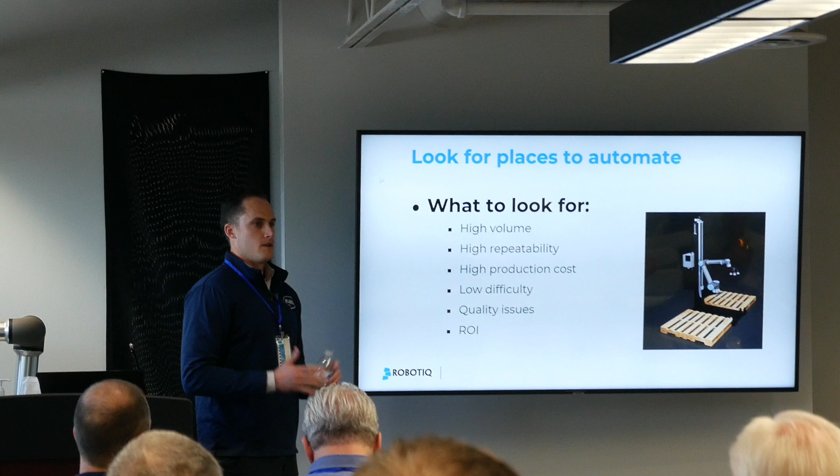What we find, because we do custom applications all across the board - some are a lot more difficult than others, and some land, some don't - is that palletizing is a really, really great place to start. It's a process that 90% of our customers have. You guys are all making something, and it's got to go out the door, so 90% of the time that's on a pallet, and someone is currently doing that, or there's some process currently doing that. And normally it hits on all of these factors.

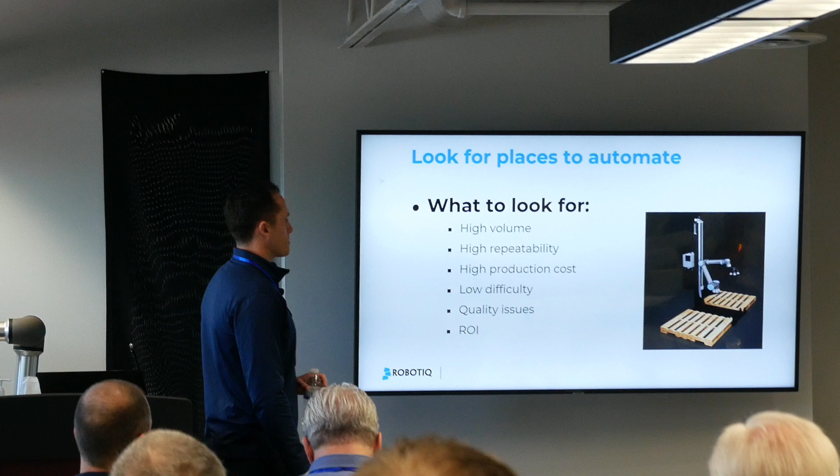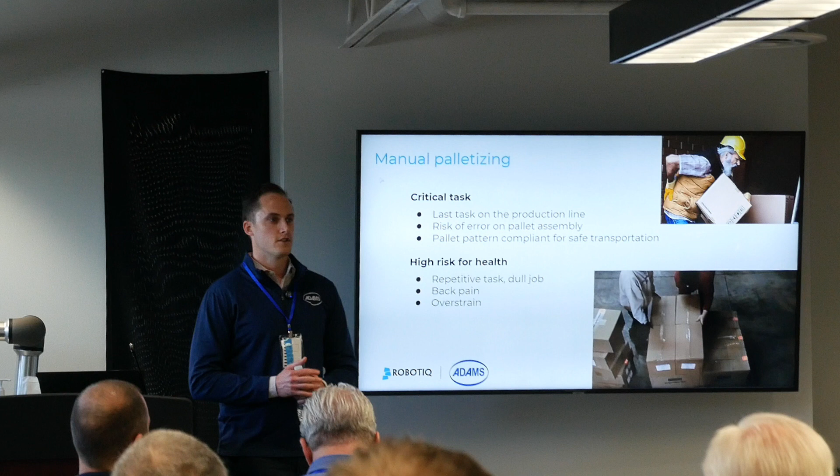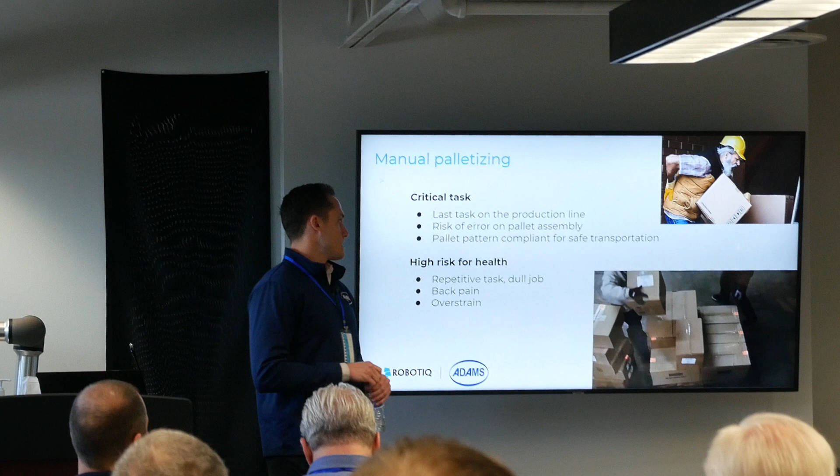Manual palletizing is a critical task. It doesn't seem like that because you're just stacking boxes, but it's the last thing that hands touch before it goes out the door. So there's issues around: did the wrong product go on the wrong pallet? Now you're dealing with customer complaints, returns, whatever, all of that stuff. And then there's a lot of ergonomic issues with it as well, depending on what you do - some of that stuff's pretty heavy.

It's hard to say how long people are willing to stack boxes all day. It's hard to keep people doing those jobs. And it's not a task that you probably love paying for, because you'd probably rather have those hands doing something else that has more value to your process, and not just wasting time stacking boxes all day long.

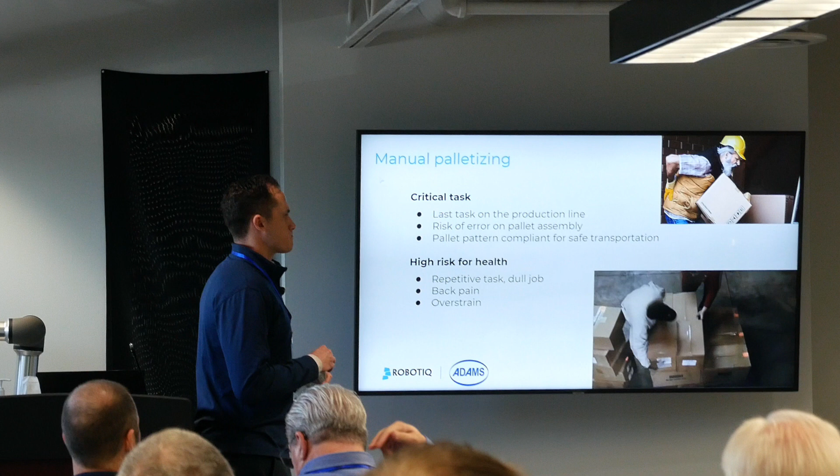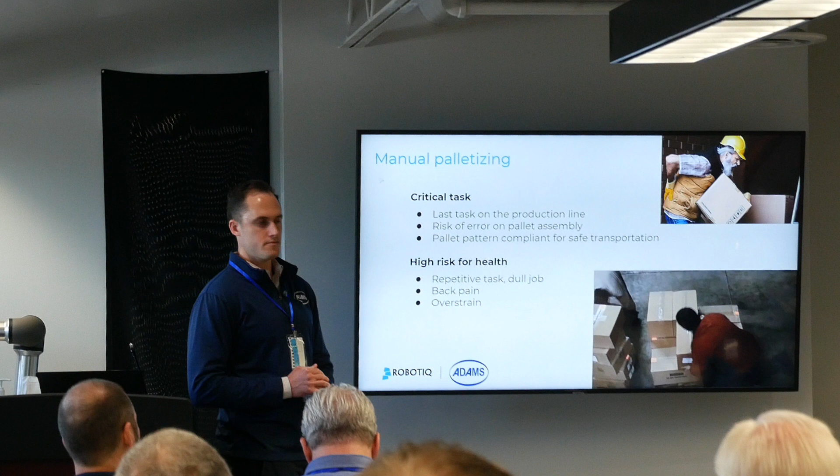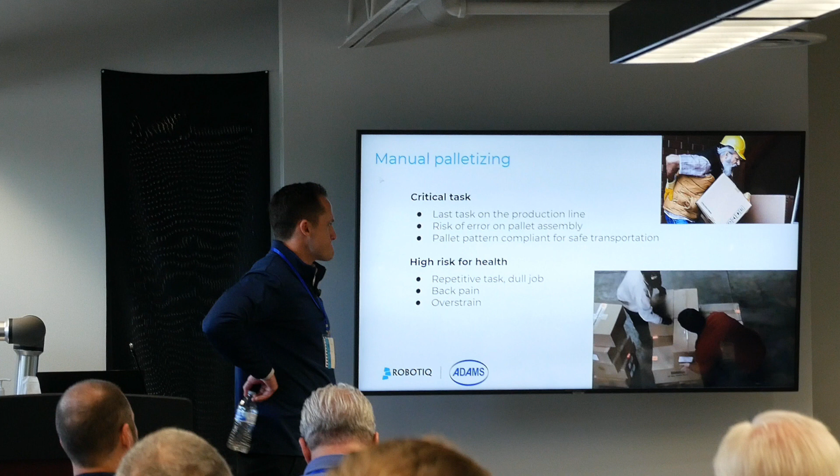We have a customer, Cascade Coffee up in Seattle, and the upper management was being pulled into these tasks because the temporary workers that they had hired didn't know how to build the stacks properly. So it was a constant repalletizing that was occurring, and upper management was being pulled into a task he should not be focusing on. But yet the product had to get out the door - he had to satisfy his customers' needs. So he was being pulled into something he shouldn't be; he's supposed to be focusing on all these other deadlines and things he needs to meet.

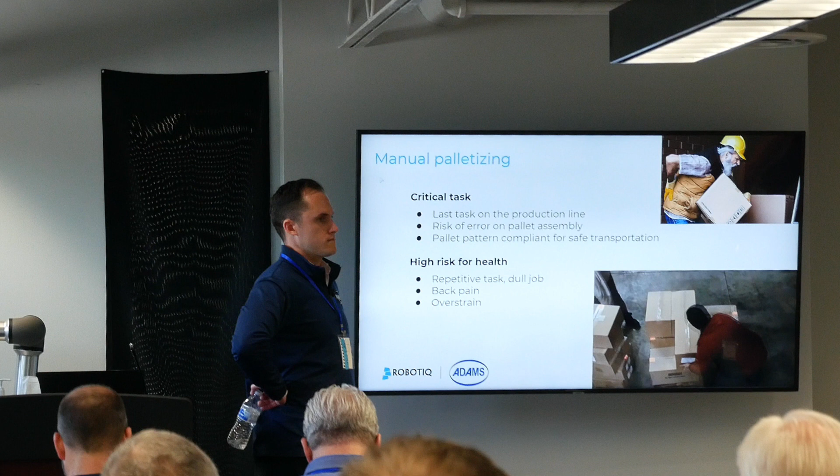But the lack of knowledge of how to palletize properly, and that temp worker revolving door of people maybe not showing up when they don't feel like it. There's not a lot of accountability there. And when they show up and have to do a dull, boring task, it's something they might not show up for again the next day. And it's something that's out of your control. If you can, consider automating these sorts of processes, you're really de-risking that happening.

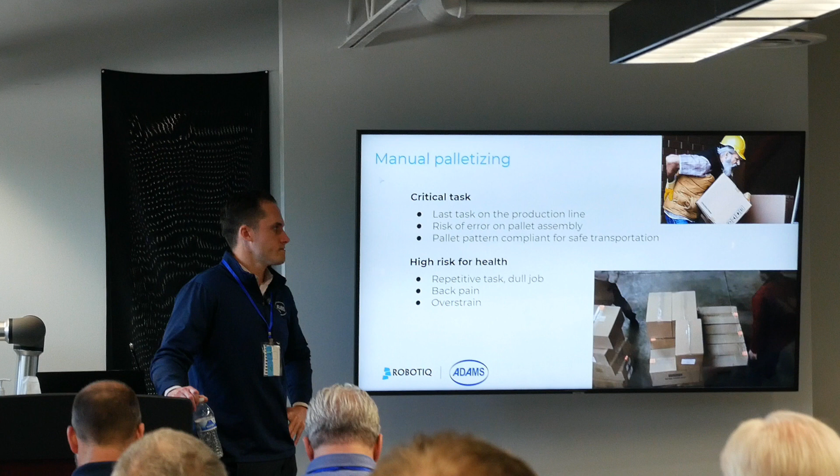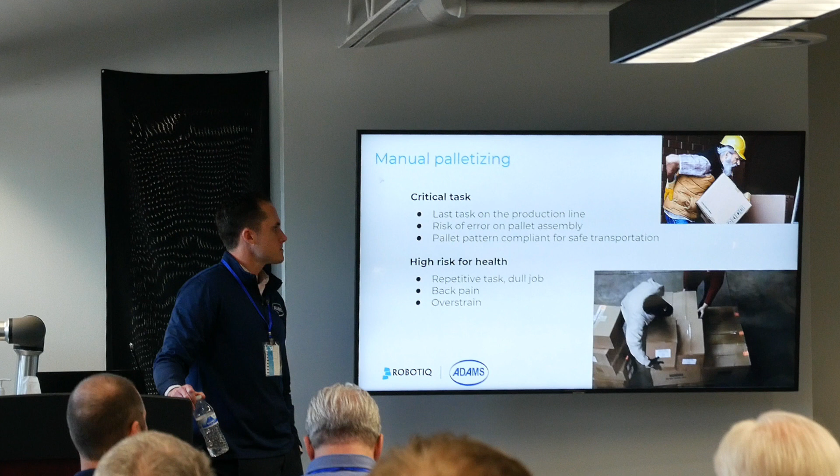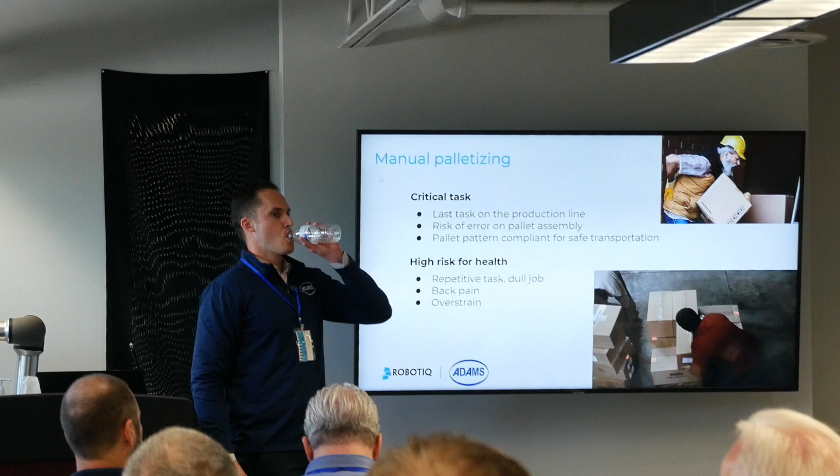In this facility, particularly where they went ahead and automated with our palletizing solutions, now if there's a troubleshoot and the line is down and they have to go back to manually palletizing, they don't like it. So if you're fearful that the shift away from this sort of task is going to be harmful for employee retention, we have not seen that. We've seen the fact that they can go into a better value-add task in the line. They're helping production increase, and they're probably getting into a job that has higher wages and is making them more happy and satisfied in their day-to-day.

That is a snowball effect, and that's something that maybe people don't track in statistics. Satisfaction of that employee matters a lot to how good the production is going to be, how happy they are to show up, they're showing up on time, and then things are being produced at a fast rate and you're meeting your customers' demands as well.

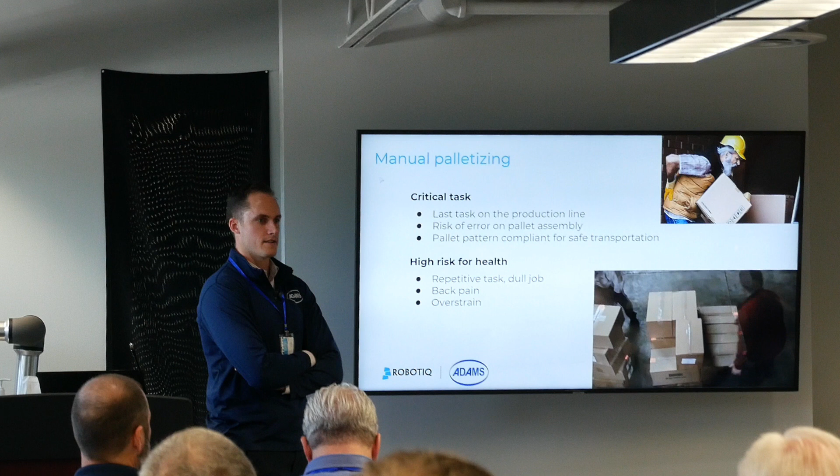Yeah, one thing we'll talk about is, from an operational standpoint, it adds predictability to what you're doing, right? Knowing, not having to say we're going to be way behind today because 3 people didn't show up. You know what I mean?

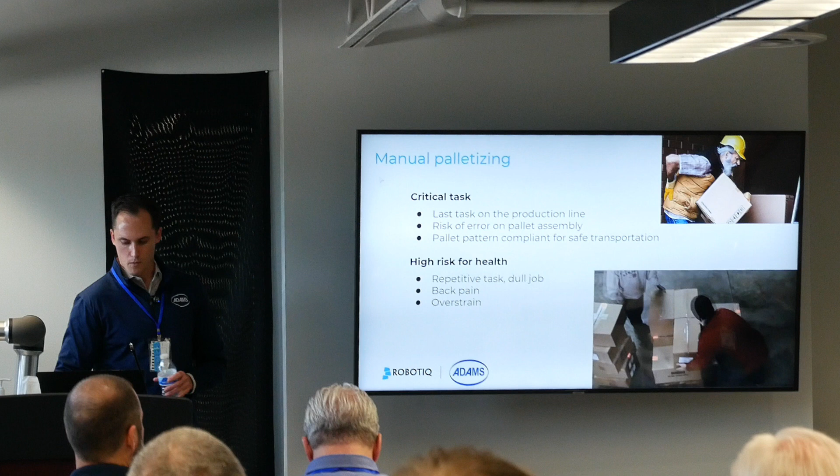So let's say you decide, okay, we're gonna palletize, right? You can obviously continue manual palletizing, and these are the issues we see associated with that. Those are pretty cut and dry there. But you can also do industrial palletizing. What we're going to touch on here is the value of doing a collaborative palletizer, like the one you guys will see down in the shop after this.

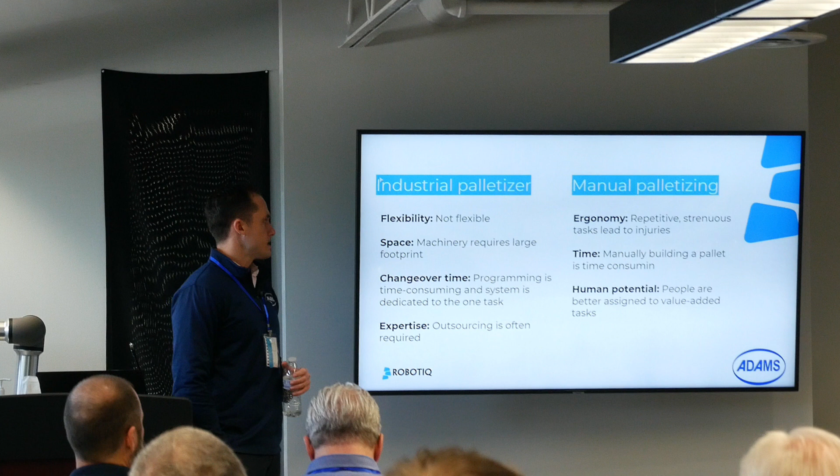Industrial palletizing definitely has its place, right? I mean, we've done them. If the application calls for it, it is what it is. If it's really heavy or really, really fast or anything like that, you just have to go that route.

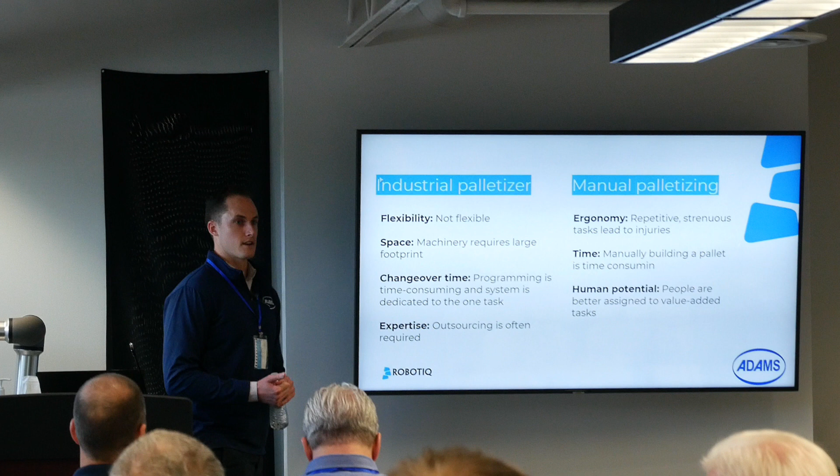But one thing, they're not flexible. So it better be something that you have a contract for X amount of years, not something you can be fluid at all. You can't decide, okay, for 6 months we're going to do this, and 6 months we're going to do that. Takes up a lot of space because they're industrial robots, so they have to be hard guarded. So now you're talking a big cage, a lot of safety. It's not as flexible to get pallets in and out. There's just a lot more that goes into it.

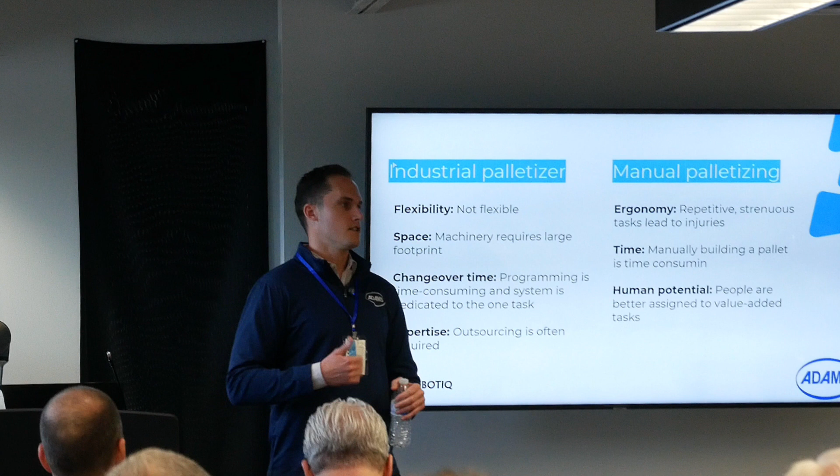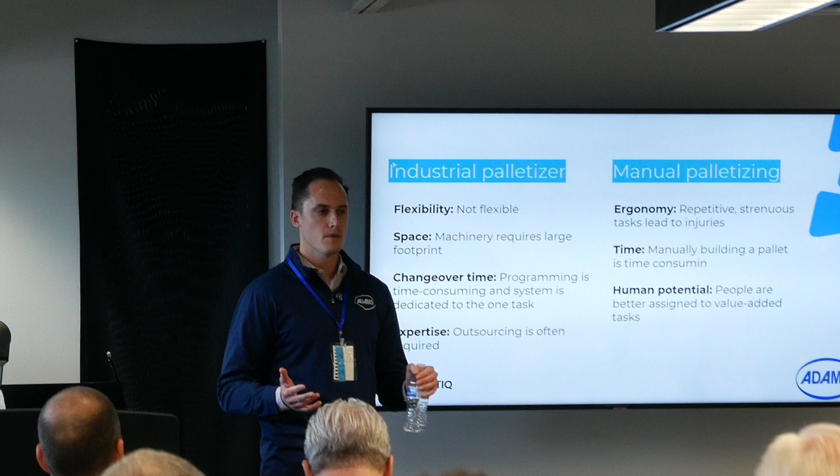The time, right? Most of the time on anything industrial related, unless you have a group internally that does robot programming, you're going to be relying on a third party like an integrator to do it. And then any sort of changes or tweaks to a program, you're either going to be at their mercy for when they can get that done, or you're going to be doing it yourself, and that takes a lot more time.

Yeah, I went into a facility and they had a big room dedicated to palletizing. It's a well-known brand, they produce some nice candy. I love their candy, it smelled good in there, all good things. But what they noticed is that they had these giant palletizers, there were 2 of them in this room. And when those went down, it didn't just affect one line, it affected all 15 lines feeding into that giant palletizer. So now all of a sudden this lack of flexibility and ability to get anything out the door was a mad panic. And then again, they relied on that outsourcing of knowledge coming in to fix that issue. It was just a snowball effect.

So the idea for them was to take a cobot palletizer, drop it in on a few of the lines, be able to maybe move that when needed in certain production instances. But if something were to go down, it would affect 1 or 2 lines, not 15 lines in that instance. Also, all this crazy conveyance that is overhead and all of this, it looks really impressive, but the amount of money for installation of something like that and the cost, and then actually knowing that you're going to even get that material.

So pretty soon your project that was, we want to do this year, it gets pushed down the line, and the time that you don't automate is all time that we're wasting. And we all know that, right? Time is money. We all hear this.

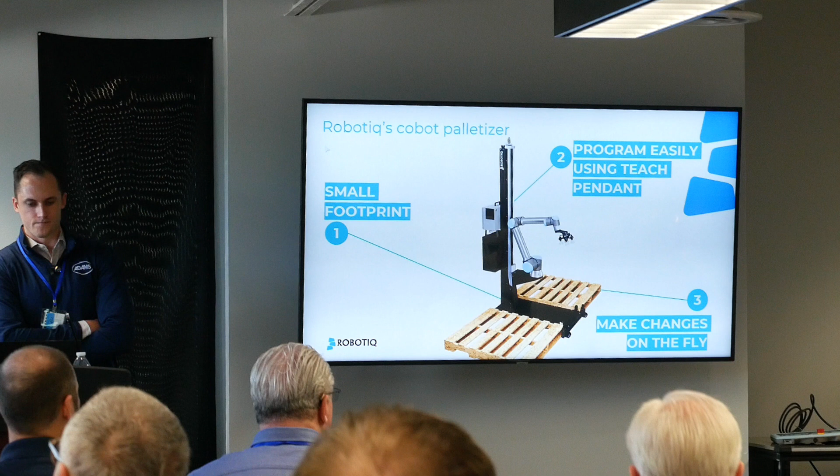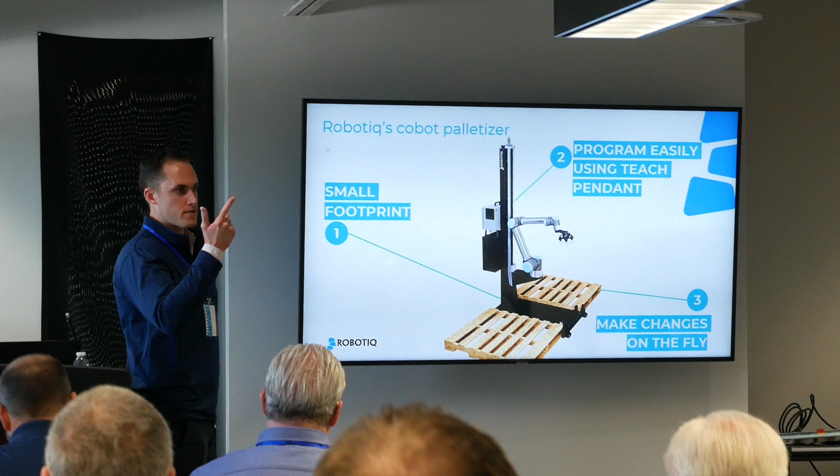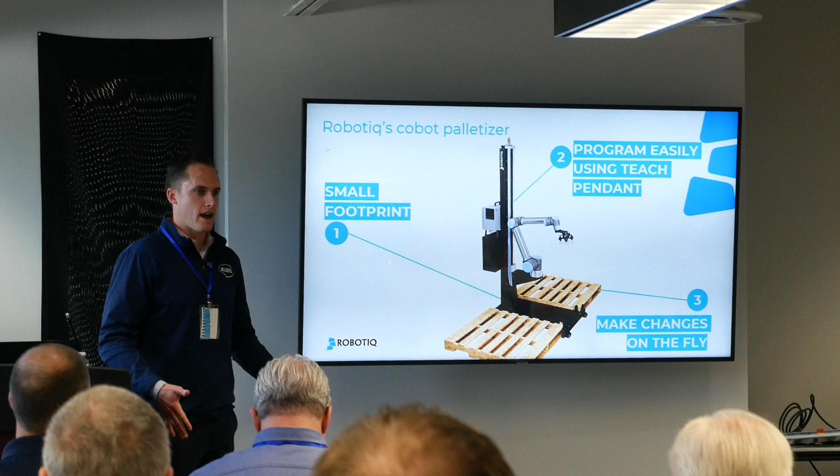So we'll jump into some of the different models. We have the brand new UR20, the PE20, out on the floor, so I'd encourage everyone to go take a look at that. We've got a few different models, but we'll jump into that here in a sec. When we talk about a cobot palletizer, this is basically what you're looking at. Another thing we touched on was the footprint - when you go out there, you'll see that's the biggest one. You're really not taking up any more footprint than you would to have two pallets next to each other anyway. Our base is 2.5 feet wide, so that's a real big advantage.

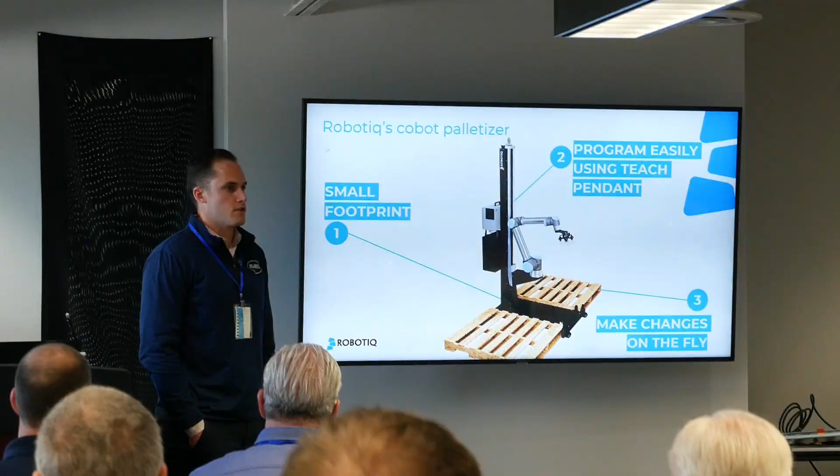Like Kendra was talking about, programming using the teach pendant - that knowledge transfers so much easier now. You don't need to know Python or C# or anything to program a robot anymore.

So to jump into the teach pendant, if Kendra wants to walk through this. Yeah, I'd be happy to.

Universal Robots created a cobot, and a lot of other companies are creating cobots now, but what makes them a bit unique is the ability to integrate with third parties such as Robotiq. So if you think of your smartphone, you have all these apps you're using constantly, and you don't really think twice. You know the brand the app sits under, but you don't really think about how easily that integrates on your phone. You just use the app when you need to get maps or do something like this.

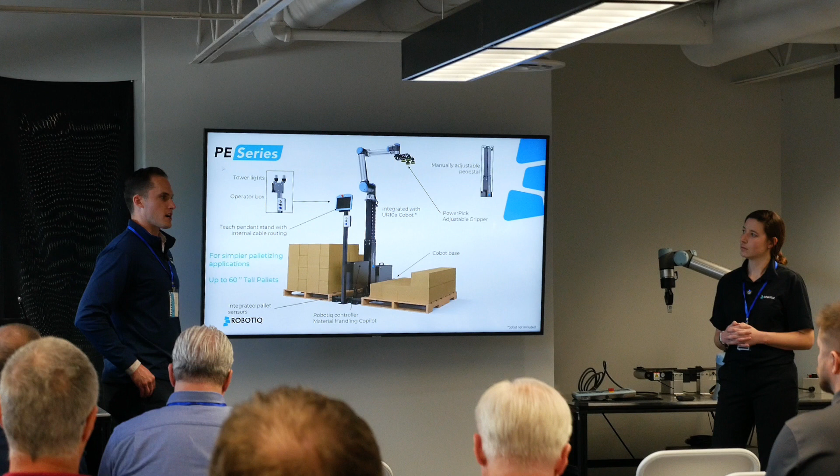Obviously, this is the most inexpensive or least costly option. But as long as your pallets aren't really taller than 60 inches, and we will double check on a simulation based on pattern and stuff like that, but you're typically pretty much good there.

Yeah, this model was actually created for the European market. So you saw how we showed you the AX version with the 7th axis, that has been the more popular unit stateside, because we stack pallets typically higher. We have a lot of changeover and flexibility. The PE10 was really made for when you're running 1 or 2 box types and you know it, and it's very repeatable, and your pallets are typically shorter.

And in the European market, it's not your typical 40 by 48 pallet, it's even smaller than that. So it's really important to consider what its use is, and then maybe what its use is going to be in the next 1 to 2 years. I think it's important to future-proof that as well. Good point, because you never want that to be a limitation, right? Our limitation in the past was the robot model, and now they have the 20. So for me, it's a no-brainer to future-proof yourself with the larger model.

And we have the 30 now too, as well, and then the UR30. So the next one, this is exactly what you guys will see down on the floor. This is the new PE20 with the UR20 robot.

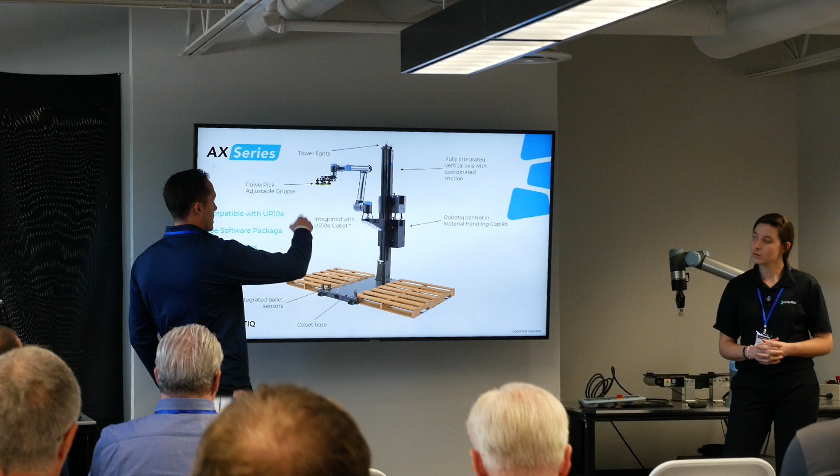And then the last one is going to be the AX series. So the biggest thing here is the Cobot's actually on a 7th axis. Now, one thing with our system that's a big advantage is this 7th axis in the robot is synchronized motion. The reason it's on a 7th axis is to handle much taller pallets.

But what's really unique about it is, for example, you'll see a lot of systems out there that are on almost like a telescoping pedestal. But what has to happen is that has to move and then stop, and then the robot's able to go and pick. What's happening in our system here is that motion is coordinated with the robot - the robot's moving into its pick position while it's moving up or down. So you don't lose any cycle time there.

So again, it all just depends on the pallet heights. There will be, I guess I don't know when, but there'll be larger models coming out with the 20 and everything like that to handle even taller pallets. I rarely see pallets that tall, but it is possible.

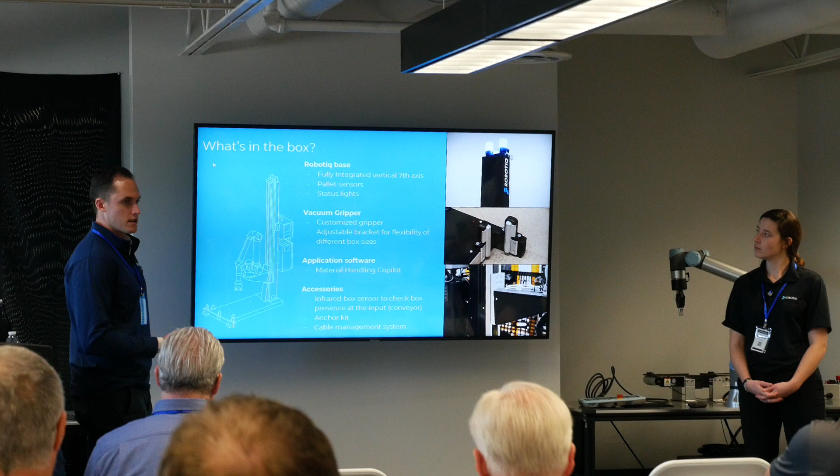Kendra and I took this out of the crate on Wednesday. This is what comes with it, right? Obviously, plus the robot. You get the base, depending on whatever model, with the 7th axis or without. Your pallet sensors, which are built in, will tell the system if the pallet's present or not, so you got to have it squared up to the base.

Yeah, that's that image here. So that's tied right to the stack light. Every time I have a pallet in place, and then I'm done, and I remove it and put a new one in, the system's automatically shifting from a blue light to a green light to say I'm in run mode. And then, of course, we offer it with the gripper or without the gripper.

I would recommend it with the gripper because that way you're not having to reinvent the wheel. The software, of course, and then you've got the box sensor, which will just mount right to your conveyor. It's just a presence-absence sensor to tell it when a box is there. A floor anchor kit if you wanted to do that, and obviously all the cable management as well.

Another thing to note with the software, we do free software along with the kit, and upgrades as well are free. I'm sure a lot of you play in this space, and it's always subscription based with all these upgrades, and if you want any help, there's a fee attached. We're not set up that way, and neither are you. The mentality is that it's open-ended.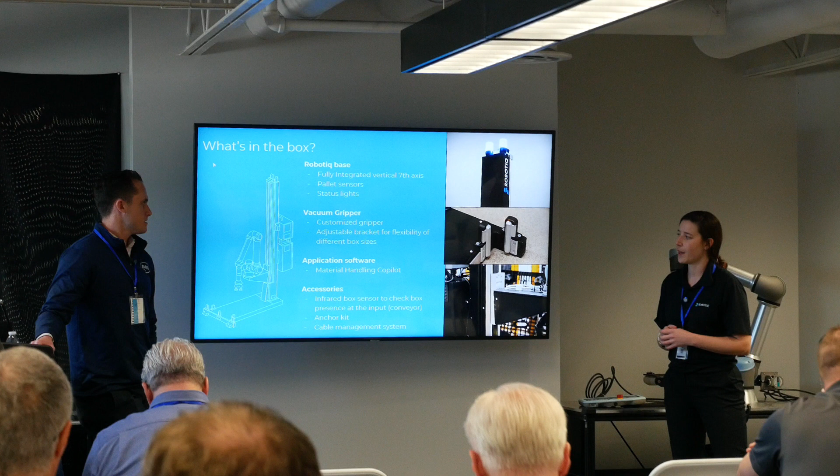Maybe that costs more on the front end, but you do not have that repeat cost over time, and you're going to have the support. We're a phone call away if you need support. So that is really the idea of our software. An example of that: 2 years ago, we didn't have the label orientation feature, and now we have that feature, and it's accessible to anyone who has our solution. Before, that wasn't a feature, but as we upgrade and innovate and create new features and better our system, you're getting those benefits as well.

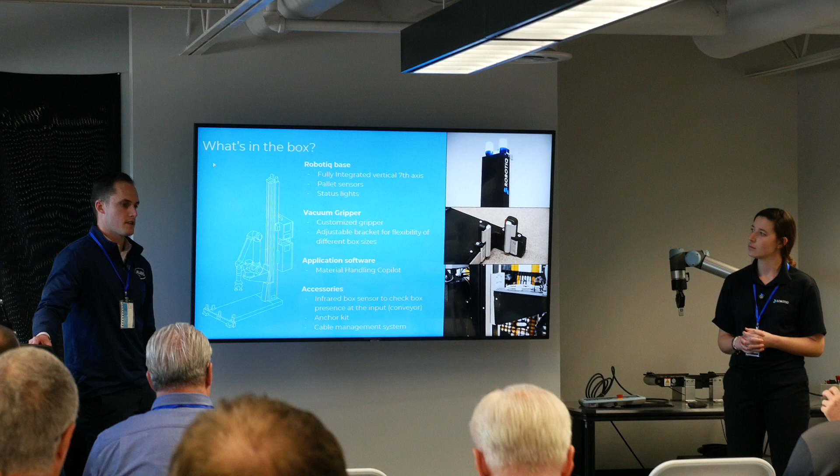And to that end about support, we're local here in Tampa, so we cover the entire Florida market as well as Alabama, Mississippi, and the Caribbean. We're a UR certified training center, so these are UR trainers.

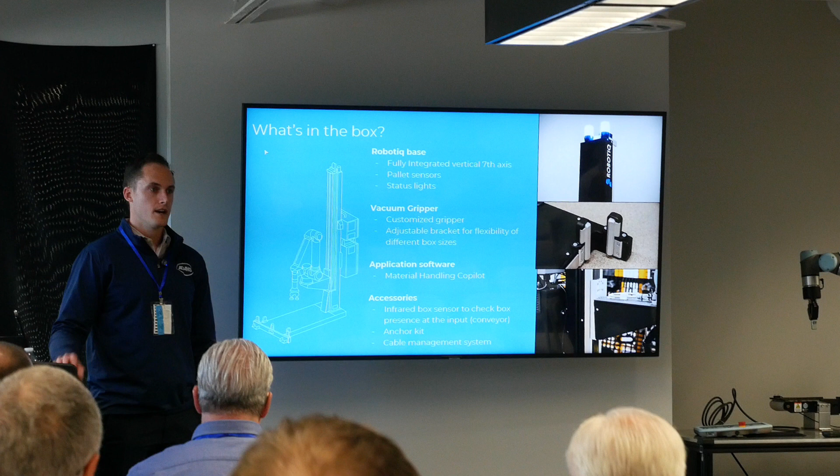We do about once a month host a class here for hands-on training, and we also offer what we call jumpstart assistance. It's extremely easy to set up and do, and you all are much more capable than myself, but let's say you just wanted someone out for a day or two to be by your side while you get it up and running. We offer that too, our engineers will come on site.

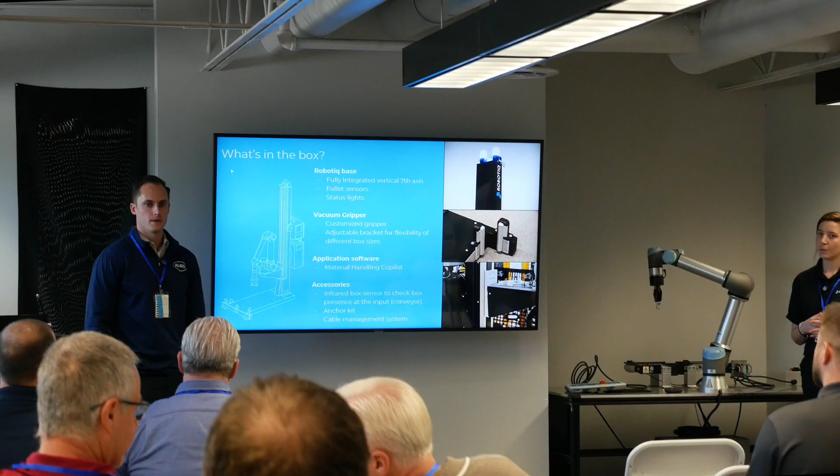That's another thing that's kind of innovated over time. We made the assumption at the beginning that everyone would have these capabilities, but we understand it could be your first cobot and first time doing something like this. So some of the pain points of other customers has resulted in this additional startup assistance to help guide for 1 to 2 days. The idea is 1 day is mechanical startup and installing software, and the second is digging into the software, getting some of your programs running, and shifting that knowledge to people within your facility.